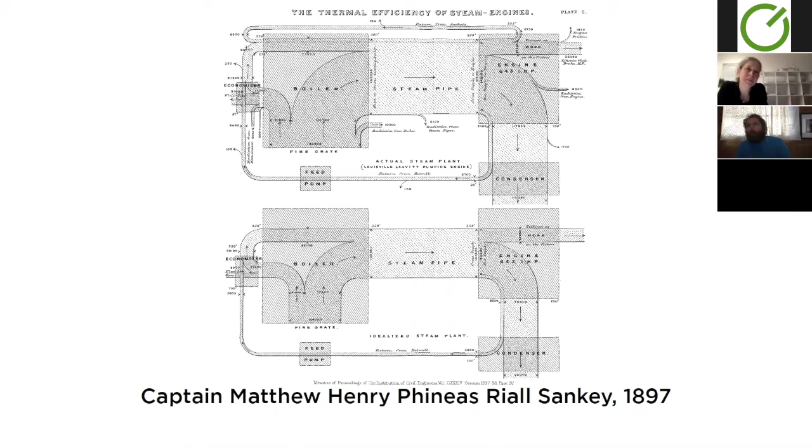The first Sankey diagram is often attributed to Captain Matthew Henry Phineas Riall Sankey, who was in the British Navy, and he drew this diagram, which is a Sankey efficiency or energy flow diagram through the boiler in his steamship. But we've since realized that perhaps a little bit earlier, this Sankey diagram by Minard actually shows the flow of Napoleon's soldiers as they marched into Russia.

This was in fact published almost in parallel to the National Energy Dilemma in Scientific American. Energy in 1973 in America was on everybody's mind because of fuel restrictions and heating restrictions. I just add this here in some respects to show how far we haven't come.

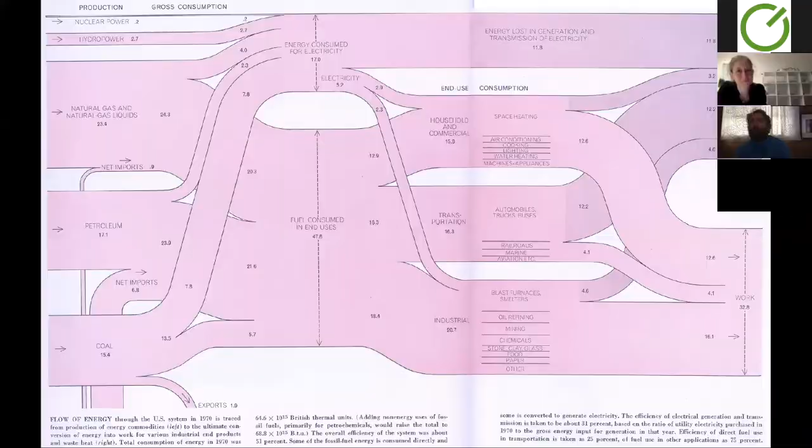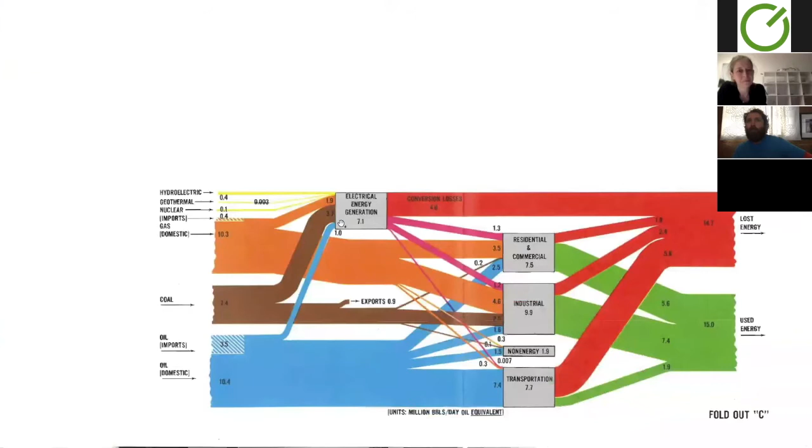Anyway, here was the National Energy Dilemma. They showed the energy consumption as a very simple Sankey diagram, every year. You can see as I flip through these slides—I think it was 1950, 1960, 1970—and then they predicted this is what they needed by 1980 and 1990.

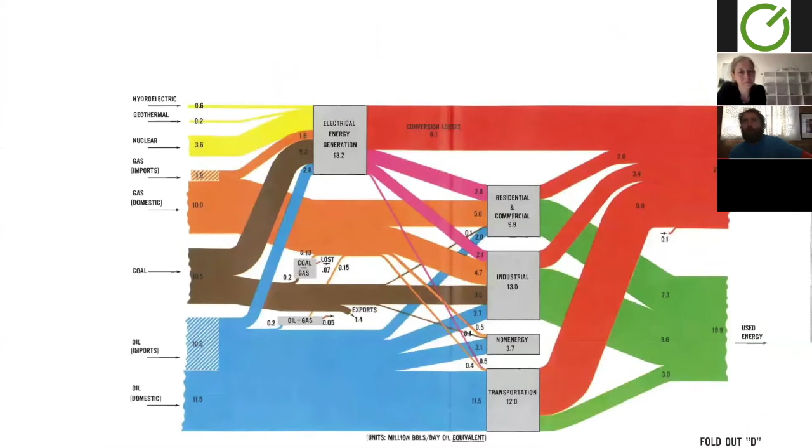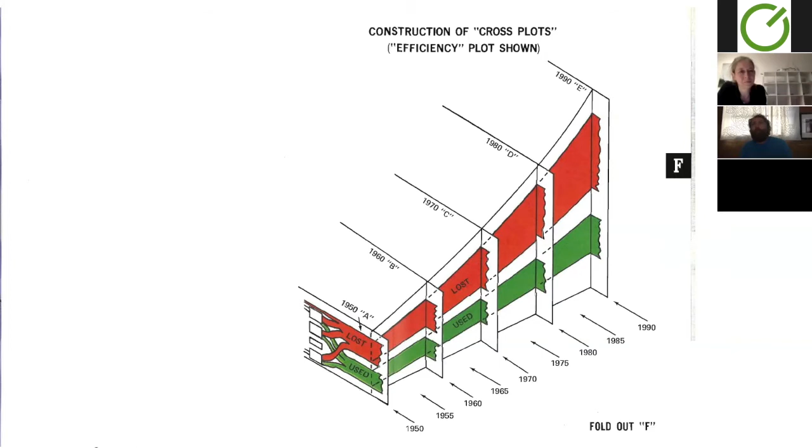And you can see they actually intended to show that because this was increasing the energy consumption and demand so quickly for the United States, since they were the Atomic Energy Commission, that the only way to solve this problem—because they were projecting, if we were using their projections, America would be using five times as much energy today as it actually is—so they projected that we could only do that with atomic energy. That work ultimately led to...

Nixon setting in motion the creation of the Department of Energy and the Energy Information Administration. Incidentally, he also began the EPA, and this is the first energy flow diagram that was published by Lawrence Livermore Laboratory in partnership with the Energy Information Administration in 1976. So this was the first time, and since this moment, America has been publishing this energy flow diagram every year.

Maybe just to make sure everyone's up to speed here, you read these things from left to right. On the left-hand side, this is called the primary energy input—that's the cubic feet of natural gas or cubic meters, the tons of coal, barrels of oil—and how they flow through. We made some fairly arbitrary decisions in 1976 on how we would draw these diagrams, how it would flow into electricity generation, residential and commercial, industrial, and transportation. And then as an overall efficiency measure of the economy, they would talk about the rejected energy and the useful energy way over there on the right, which was some measure of energy efficiency.

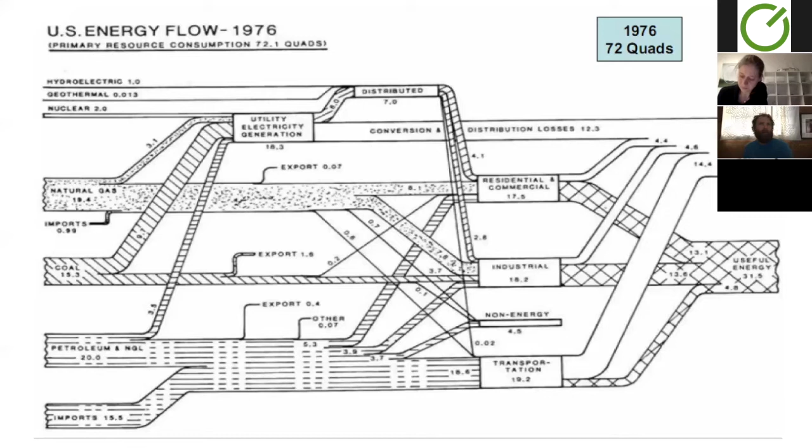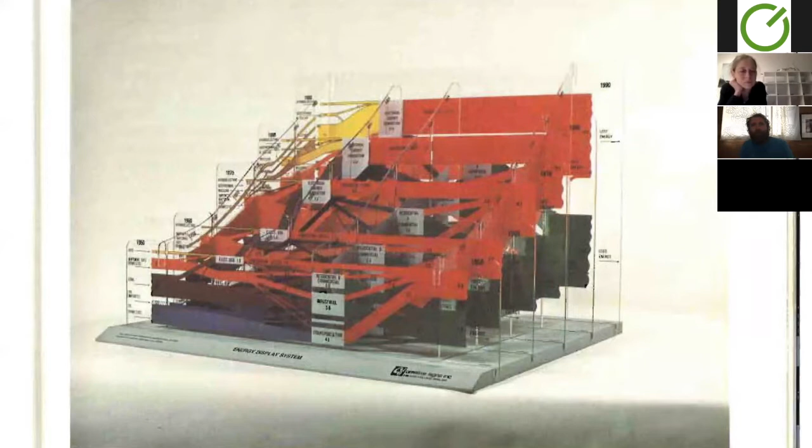This is the fabulous three-dimensional Sankey diagram. A two-dimensional Sankey diagram is difficult enough to understand, but this was the three-dimensional version presented to American members of Congress so they could be well informed as they voted on measures to solve the 1970s energy crisis. I've actually seen this artifact live. It's very difficult for even somebody in the energy industry to nominally use this to write and plan energy policy.

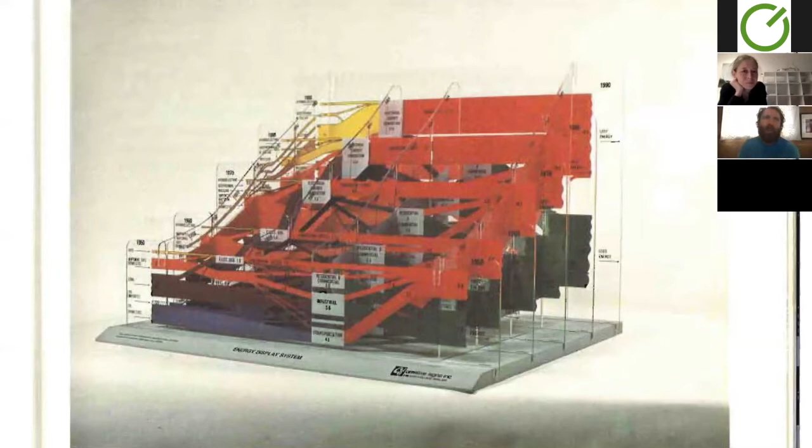As a historical anecdote, energy was such a national issue in 1977 that even the Flintstones were employed in a one-hour feature-length movie on the problem of energy, to do broad public education about energy issues. I highly recommend finding and watching this, because in some ways it communicates the energy problem to the public better in 1977 than we do now. It does it using cartoons, and you'll realize how little has actually changed—every solution we now put on the table to solving climate change is mentioned in this Flintstones cartoon from 1977.

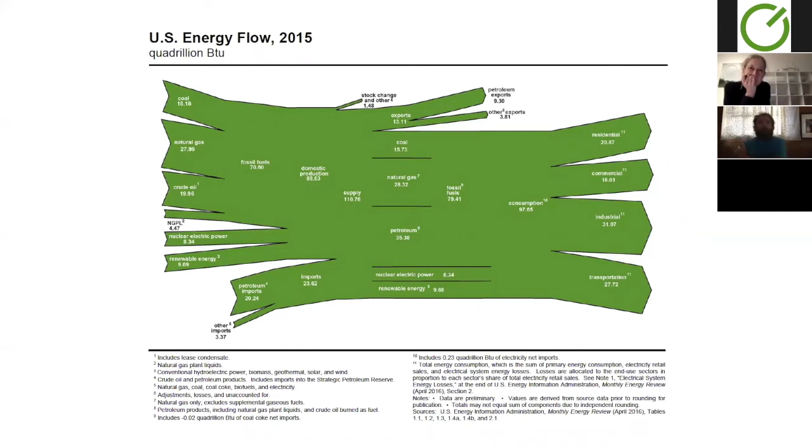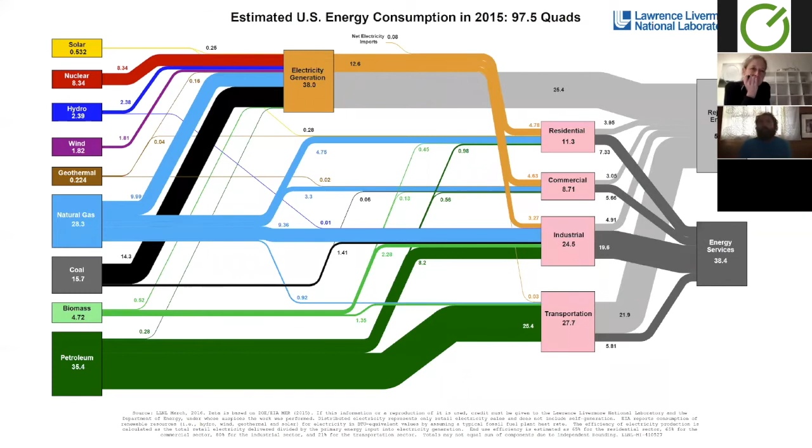So what does it look like now? This is the 2015 Sankey diagram of US energy flow. America still uses quadrillion British thermal units as the unit of measure—you can basically think of those as exajoules if that's your preferred set of units. For today's purposes, we don't need to think about the units, just the proportions. This is from Lawrence Livermore National Laboratory; they do the public-facing version of these Sankeys each year, and if you think back to that 1976 chart I showed you, you can see how little both the actual data and the presentation of that data has changed.

Because of my work and interest in energy, I wanted to understand: is this everything we can know? So I set about the task of looking at how much more information we have, and where it comes from in the creation of that diagram.

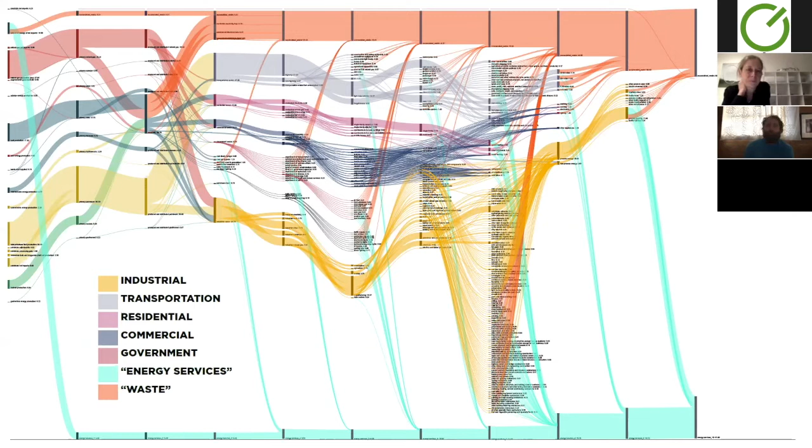Just to give you a taste of the detail: in transportation, these are all the vehicles by category, but you even have information about, on the right-hand side there, how much energy is used, for example, to move in trucks, class 7-8, so that's large trucks, class 3 to 6, more sort of European-sized box trucks. And on the right there, you can see the energy content in quads of moving various products within those trucks.

We also can get interesting statistics like 0.66 quads, which is roughly two-thirds of 1% of US energy flow, is people driving to school and to church.

Again, there will be some slides here that are mostly for people who wish to follow up. So I'll skip over them here, but if you need to go back, this will provide some context for the slideshow.

Residential and commercial buildings are divided into different categories, and you can in fact look at the amount of energy that goes into keeping the lights on in churches or in warehouses or in food sales or in hotels or in schools and universities. So the energy that goes into schools and universities is nearly 1% of the US total energy flow.

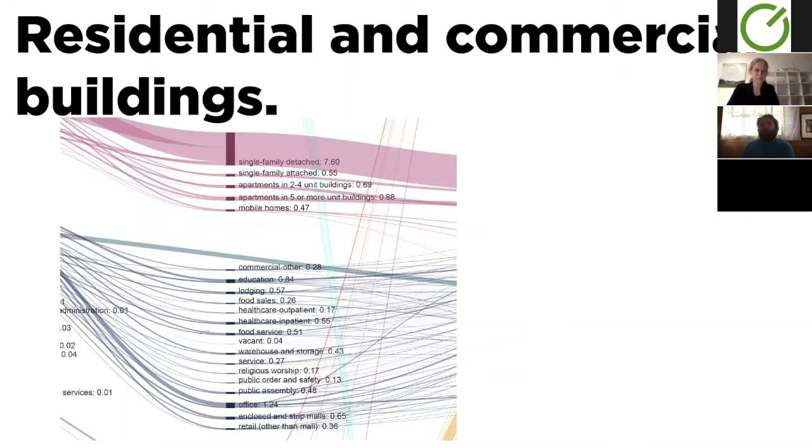Again, we have incredible details about manufacturing, right down to whether it's used to make cement, lime, paper, etc. It's useful to understand that most other countries in the world don't have data this good. They have not collected it for this long, and those countries that do collect data like this often modeled their collection systems on how the Energy Information Administration in the United States did it.

And that will be important. You might be wondering why I'm showing you all this detail, but as I actually show you some of the structural errors that we baked into this data 30 or 40 years ago, it will hopefully get you to think with a little bit of skepticism about the energy data you might be using in Europe.

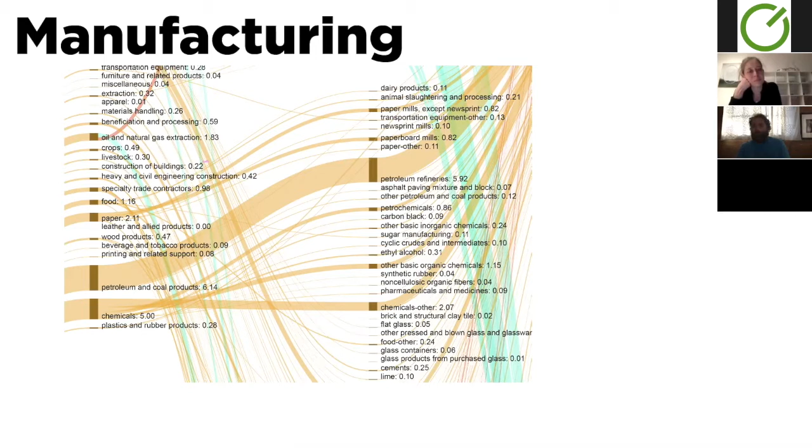So after you look at all of those energy flows that we officially collect, you might say, is that everything? But as it often took me 3 or 6 months after doing the original study to find that there were some things that were energy uses that didn't fall under any of the surveys or measurements that were in the official data. Street lighting is one of those things.

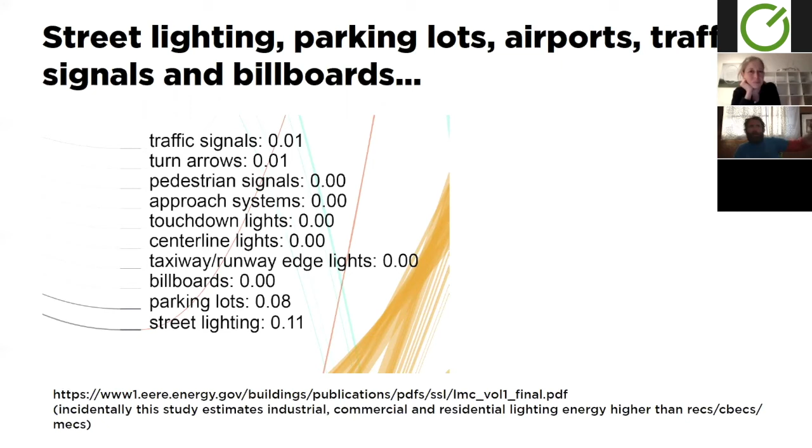The lighting over parking lots is one of those things. Because they're not inside buildings and they weren't inside federal buildings, they didn't fit in any other category, so we missed those. They're not huge flows, but actually wastewater treatment and municipal lighting are reasonably significant.

These are a tenth of 1% or a quarter percent of US energy flow, and you can see their values there. So you also need to go back and add those.

Then what the other major energy flow that is not captured in the US is the embodied energy of imports. These are estimates you can glean from the Global Trade Analysis Project.

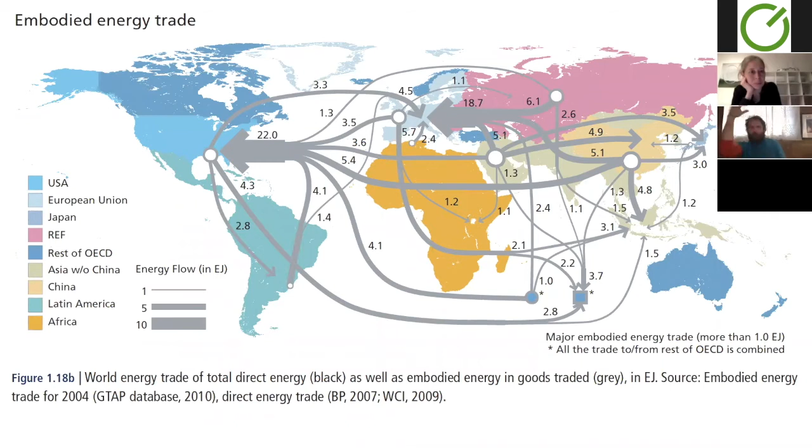Intriguingly, America is importing an estimated 10 quads of energy in imported products. Here you can go and follow the original sources of all this data. This slide is there for reference.

But it's interesting to contemplate that in the same way America had a 10% energy flow problem in the 1970s, which was imported foreign oil, America solved that a little bit, but it created a new problem because of the net imports problem, where it's importing a lot of foreign energy. I am not satisfied that this is correctly accounted for in global estimates of carbon per capita, just as an interesting aside.

You get geographic data in the US, so you can see every state where the natural gas, coal, and oil come from. Curiously, I think you Europeans love jokes where Americans are the punchline, so I may as well tell you this.

88% of fossil fuels in the US are produced in states that vote Republican, and I think that's very important to understand. I think it's 86% of coal, 88% of oil, and 87% of natural gas. It turns out to be about the same for all of them.

But if you would like to understand American politics through the lens of energy flows, fossil fuel flows are absolutely critical to the economies in those states today. The reason the Democratic-leaning states probably don't care is because fossil fuel production has virtually no impact on their economic output. Curiously, the reason those states have a lot of fossil fuels is because they are large in area - Wyoming, Kentucky, Pennsylvania, Montana, Texas - these are big states.

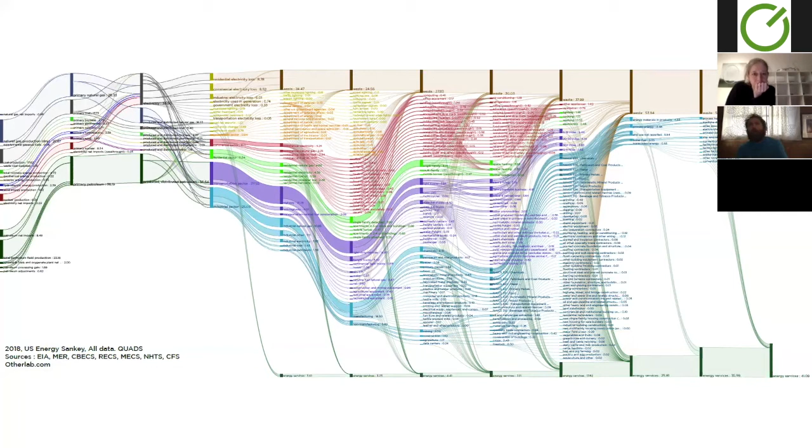You can also explore this at a website called departmentof.energy. But I think now I just want to say...

How I would now like to point out some incredible mistakes that were structurally baked in 1970 that still persist in the way we think about energy today.

The 1960s and 70s saw a huge amount of hydroelectricity built in the United States. People wanted to understand, how do you put hydroelectricity as a primary energy source into our energy flow diagrams? What is the definition of primary energy for hydroelectricity?

Obviously you can't use tons like you can with coal, you can't use cubic feet like you can with natural gas - so what do you do? Do you use the surface area of the lake? Do you use the catchment of rain? And what was decided upon, curiously, was...

They did the thought experiment: well, what happens if there is a very long extended drought and that hydroelectricity plant produces no energy? Then we would have to turn on a fossil fuel plant. So let's define the primary energy of hydroelectricity as the electricity produced at the output of that plant multiplied by the average inefficiency of the average fossil fuel plant.

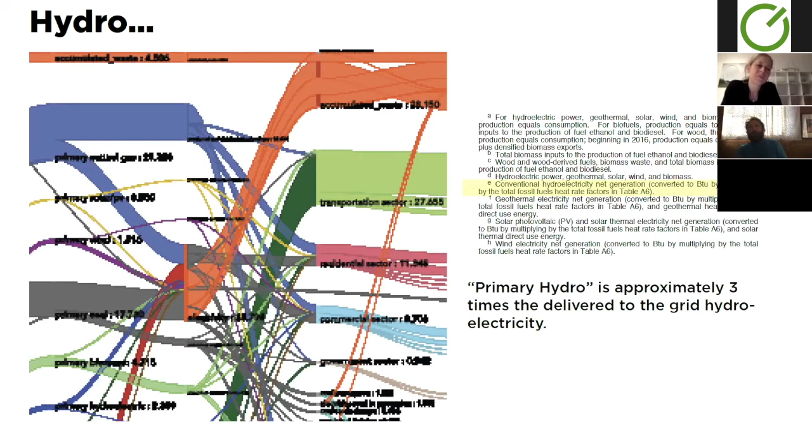I believe the EIA did that, and in Australia at least for a while, the IEA also followed that. And there are, I believe, mistakes in the European and global data that are structural. Why is that important? That's worth a couple of percent of energy flow that doesn't even exist. It's just an accounting thing.

I have a quick question on this, because I don't have the technical background. What you are saying is that all these renewable energy sources appear to be a lot more inefficient than they actually are, because there's a higher capacity of generation calculated in relation to what actually comes out in electricity produced?

It means in the official reporting, at the end of every year, America says we use 98 quadrillion British thermal units. But 2 of those 98 quadrillion BTUs were never produced and never existed. They were invented, and come from the primary energy from hydro and the other renewables, and the definition we had for those renewables that gave them the same inefficiency as the average fossil fuel power plant.

So it's a highly technical issue, but it means we over-report in the official statistics the amount of renewables we produce. And ultimately, as I'll show further in this presentation, in nuclear it's even more pronounced. We are imagining that solving climate change is harder than it needs to be, because of some semantic and definition problems that are structural in the data that everyone in the world who does energy modeling uses. This was decided in a footnote in a DOE document in 1974, and then people forgot.

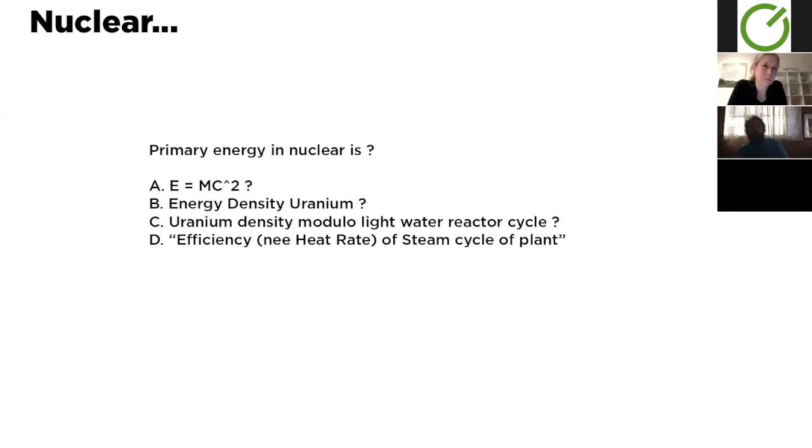I think that could also be true in Europe. I'm sorry, I'm not paid to do this work, so I've done it for America out of interest. I would love to do it for Europe, but I suspect Europe just cut and pasted these definitions from America.

And that the whole world isn't quite seeing the energy problem correctly because of how we measured energy flows in the 70s and defined it. There's a curious fact: when we think about electricity in these energy flow diagrams, people were very concerned with the amount of electricity used in electricity generation plants and the efficiency of those plants. But that means we're treating fossil fuels different to electricity. What do I mean by that?

So what I'm really pointing at here is there's a huge amount of energy use in the production of fossil fuels, their refining and production, and we count that as a useful energy flow in the industrial sector. We don't count that as an inefficient energy flow in the transportation sector. Given that more than 10% of the oil we use is used to make gasoline, it really means that when an American thinks they're driving a vehicle that gets 25 miles per gallon, that vehicle's only getting 20 miles per gallon because of the oil used in the refining process.

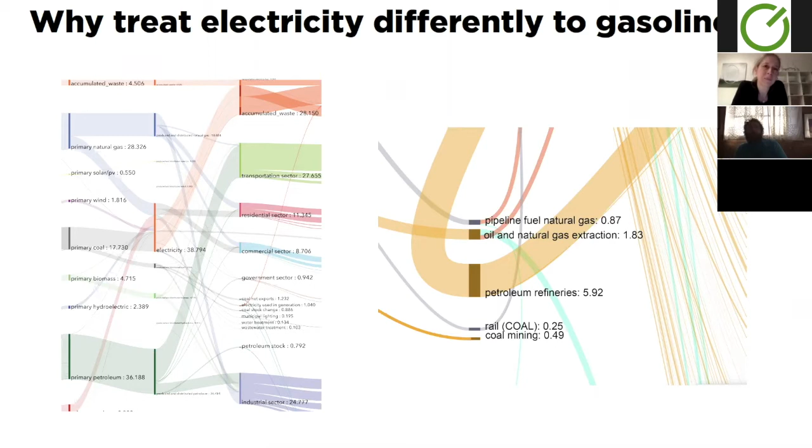So 7 or 8%, actually closer to 10%, of US energy flow is being used to mine, find, and refine fossil fuels. And that'll be important in a minute.

I'm going to maybe skip a couple of things.

So I just gave you a whole bunch of history of how we think about energy flow. I've given it to you in terms of the American experience, but America has measured these things for the longest time and wrote many of these definitions. I have seen that a lot of those definitions were cut and pasted internationally, so I think the whole world has some portion of these mistakes.

But now it's 2019 and we're all trying to figure out how to decarbonize. Let's use the American economy as an example. The approximate US energy economy today is considered to be 100 quads, all the way over there on the left. So what I did here is essentially a very high level model of the US energy ecosystem.

You can see that I've pulled out, and maybe you can see my cursor if I put it over the screen, at every point where I can pull out some energy flow that is irrelevant in a world where we commit to decarbonization by electrification, I do so.

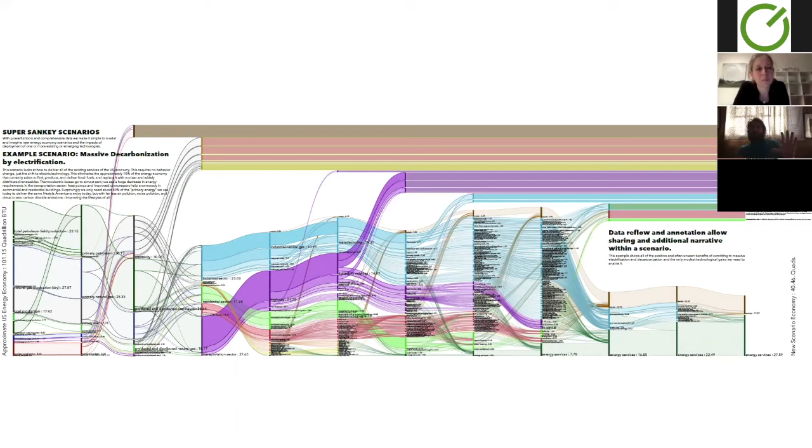So let's look at what happens when you think about, at the scale of the US economy, electrifying everything. Again, I will jump back to a lot of these slides.

So here is, sorry, here are energy uses in the US economy on the right that wouldn't be needed in a world where you have electrified everything.

So 16% of US energy flows on the right there is the inefficiency of making electricity with fossil fuels. These are the thermoelectric losses in the steam cycles of coal, natural gas, and nuclear plants. In purple, the gross assumption on the energy efficiency of a fossil fuel powered car or truck in the US is they just assume all of those vehicles are 20% efficient from well to wheel.

Electric vehicles are more than 80% efficient from well to wheel. If you do the thought experiment of electrifying all light vehicle and truck transportation in the US, assuming they're 3 times more efficient, that's another 13% of the energy Americans think they need that they won't need.

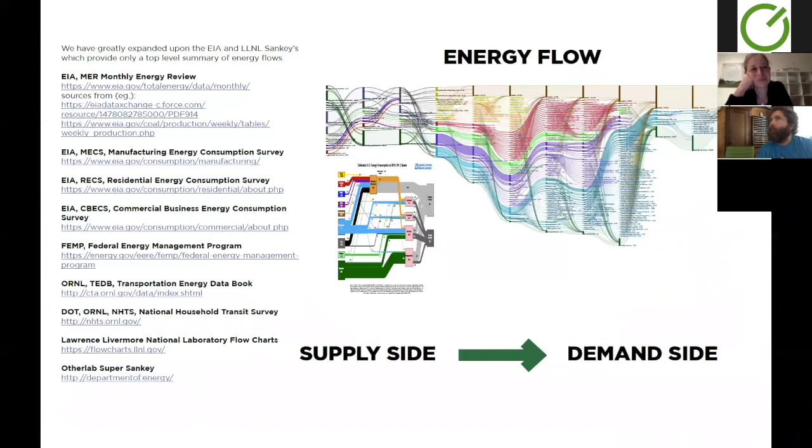This assumes the same historical grid and transmission losses of the US energy economy, which is 4 to 5%. Now, you might ask the question—I think that's a great question—but I'm going to take a few steps back that might get me there. Let me just jump around to remind myself what slides I have. I may not have the slide here that you want for that question, but let's start here.

America today averages annually an electricity delivery rate of about 450 gigawatts. To achieve this scenario of a completely electrified economy, you would need to deliver somewhere between 1.5 and 2 terawatts—so 3 to 3.5 times the current delivered electricity.

In a conservative estimate of the amount of electricity you can produce on American rooftops, you can get 300 to 400 gigawatts equivalent. So our residential rooftops are good for a quarter of it, commercial rooftops are good for another 10%. America has 8 parking spaces per car, and 250 million cars. If you use some small portion of parking spaces for solar, you could produce another 25% of it. So it is completely reasonable in America, mostly because it has low population density compared to Europe, for example, to produce all of this with solar and wind, backed by a little bit of hydro. It is achievable.

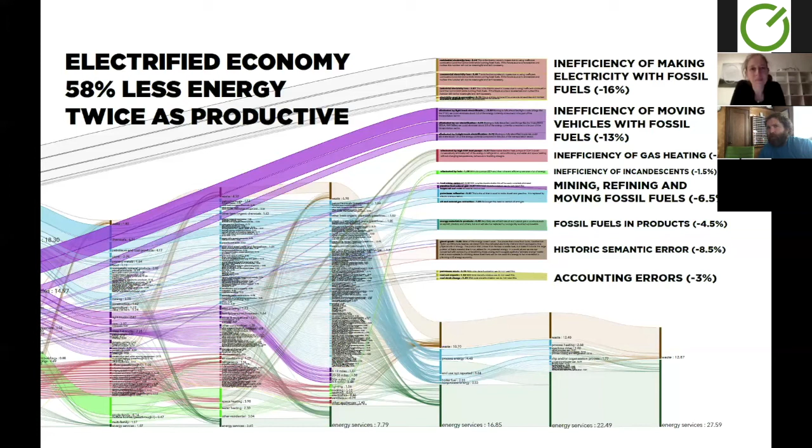So think about that sort of high level modeling when we think about costs. The real problem is that the costs are now workable everywhere. It's just that we don't have the full solution.